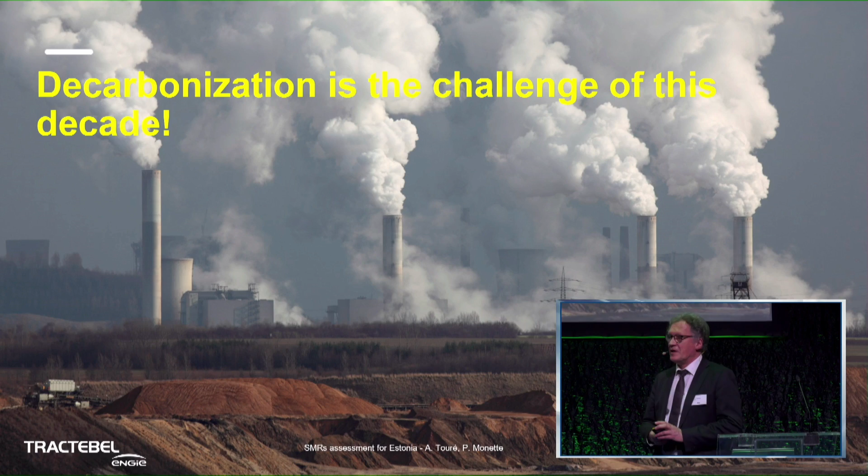So this is the challenge of the century. This is the challenge of this decade, to put in motion the solutions to actually giving up our addiction to fossil fuels, which today constitute 80% of primary energy, to carbon-free energy, as committed by Europe by 2050 to achieve carbon neutrality. And we know that achieving such an objective will require massive amounts of energy, carbon-free, available on demand, and very reliable.

We know that renewable energy alone will not achieve this goal, and so nuclear power must be part of the long-term sustainability equation. Safe, affordable, sustainable nuclear. When we talk nuclear, we first have in mind the current construction projects. So Generation 3 reactors, for those who don't know, were developed in the 90s, and tended to be of a very big size.

This EPR in Olkiluoto 3 in Finland is 1.65 gigawatt electricity. The contract was signed in 2003. So you see the huge construction time and actually construction delays. These are due to the size of these reactors, power plants, and complexity. And this complexity has rippling effects everywhere, on the design, then on the licensing, then on manufacturing and construction.

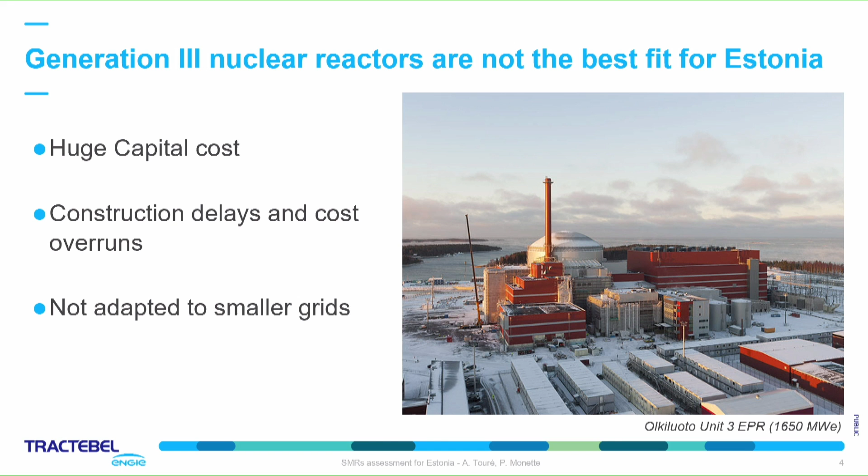It breaks my heart because I worked on this project, I worked on other projects, and there are people in this room who can indeed share the same experience. Unfortunately, those very large projects could not be built in some cases, or have taken huge delays and cost overruns. On top, they are not adapted to smaller grids, and they are not very flexible. So, too bad, but we need to move to the next generation or to another solution.

So, what are the conditions for new nuclear to become successful? We have pictured it in this slide in the form of three conditions of success, or three main challenges. The first challenge is to recreate an appetite for investing in nuclear. And that goes with smaller size, smaller capex, smaller financial risk, better certainty on manufacturability, shop manufacturing, shipping to the site, shorter construction time. That's absolutely necessary, otherwise the financial burden of covering the risk is just too big.

The second challenge is to recreate trust in nuclear safety and be able to demonstrate that the new solutions will definitely avoid or eliminate the risk of accidents which have occurred in the past. The third challenge is being able to play a significant role in the zero carbon transition that I talked about, in a new energy system which will have a lot of intermittent energy, so flexibility will be required, and also beyond electricity, there is the need to decarbonize other sectors of the economy, industry, right?

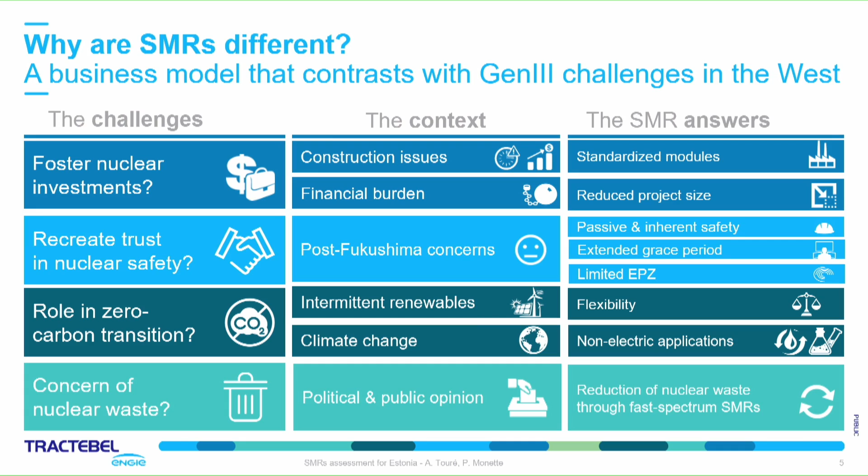And finally, reduction of nuclear waste. Some reactors, fast spectrum reactors, have the capability to work on used fuel and to virtually eliminate long-lived radioisotopes.

This is just one example of this revolution in nuclear safety by having the so-called concept of walk-away safety. If something happens, you don't require operator action. You don't rely on the AC or DC power systems. And there's no need for bringing additional water for a long period of time for long-term cooling. Triple crown safety as advertised by NuScale.

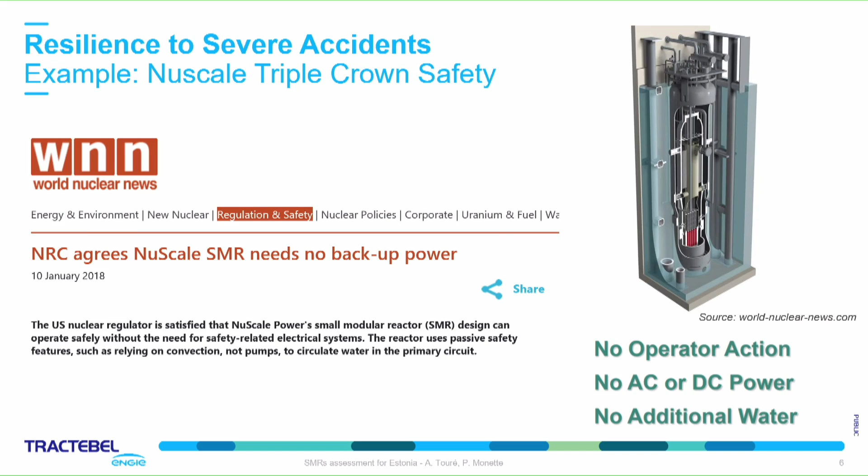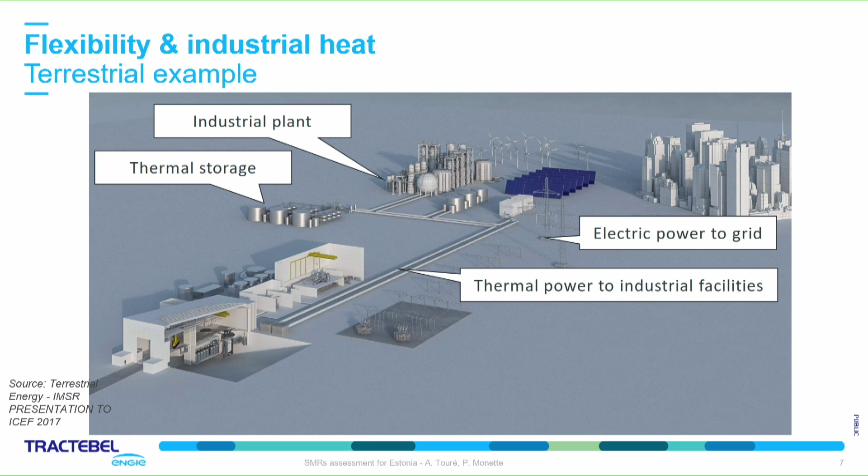And this is another illustration of the new energy landscape in which small modular reactors would play a role of providing electricity, but also variable electricity, storage capability, heat, industrial heat to an industrial complex, and serving the needs of cities. So things have to be seen in that kind of ecosystem of complementary sources of energy.

So what is the landscape today for SMRs? Well, it's flourishing everywhere in the world. There are over 50 different designs of about 6 reactor families. So it's very diverse. It's not like buying a car from a pool of different brands that are all essentially the same machines in terms of functionality and design. We have a great diversity of designs among those 50 products.

And of course, according to a particular need, in this case Estonia, there's a need to down select from those 50 designs. And that's exactly the question that will be addressed by my colleague now, providing this down selection methodology to zoom in on what we believe should be technologies to be pursued for Estonia. Thank you.

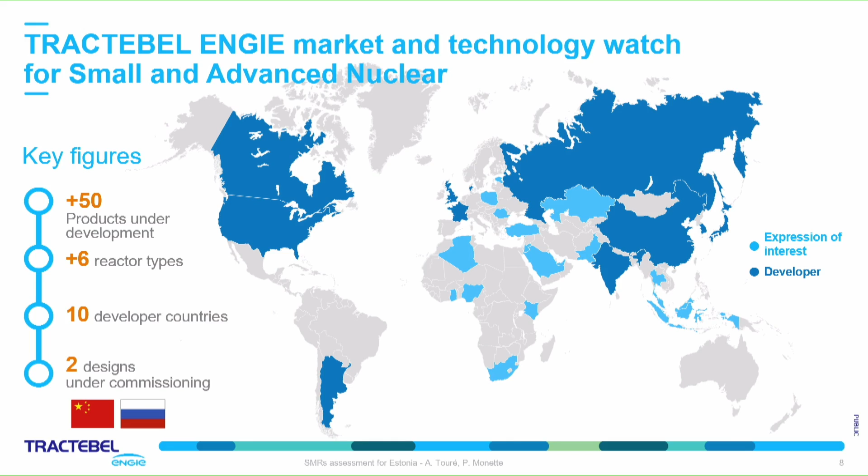I think now that we know a bit more about small modular reactors, we can really dive into this comparative assessment study that we've performed, which, as Philippe mentioned, looks at a landscape that is very big. We are starting from more than 50 design initiatives popping up around the world, and we wanted to answer two questions. What are the design initiatives most likely to succeed, to emerge from the market? And what are the best fits for Estonia and for the Estonian energy future?

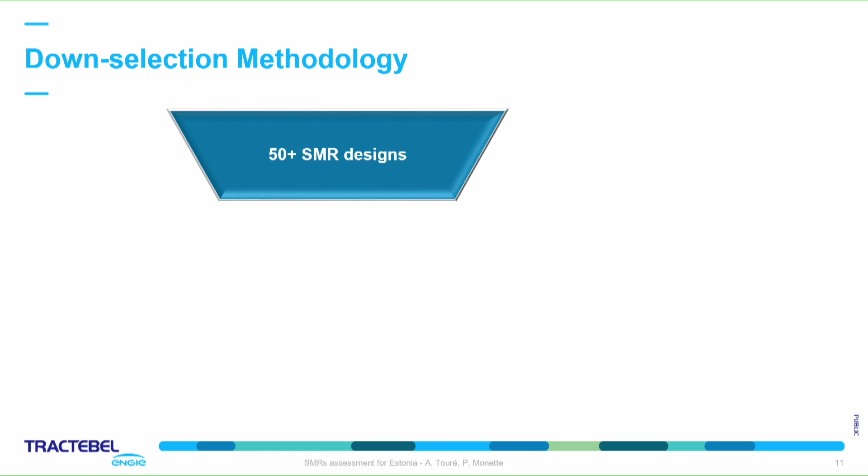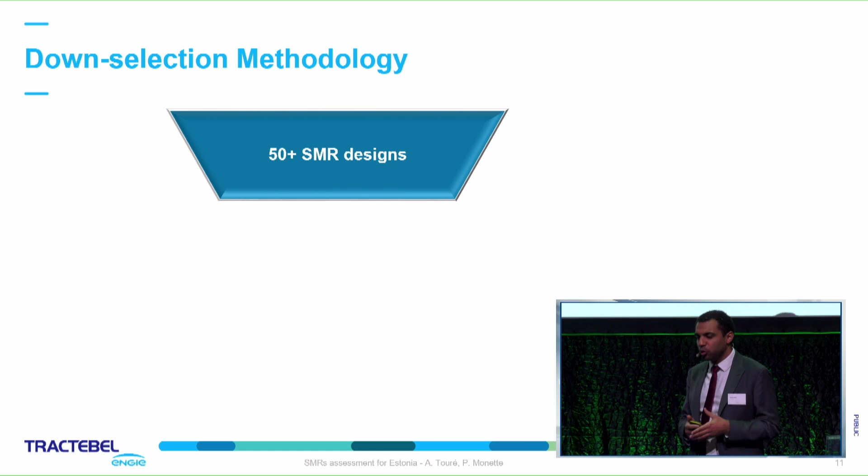And for that, we also asked ourselves one additional question: what are the criteria for success for an SMR? So that's the starting point of our methodology. As I mentioned, we started from 50 designs, and comparing 50 designs is an enormous task, and obviously not the most efficient way to deep dive into all of them. So we applied a list of exclusion criteria.

This list of exclusion criteria was established in partnership with Fermi Energia, and we wanted to see what are the real requirements for an SMR to succeed and to be part of Estonia's energy future. So let me just cite a couple of them. I won't go through the whole list, but we focused on small modular reactors, but not the very small, so not under 25 megawatts of power.

And one important criterion, to emphasize what my colleague Philippe has said, is safety. We put a very important criterion on being able to rely on passive safety. The idea is that for an SMR to be a game changer in terms of safety, in a worst case scenario, if something bad happens, the operator does not have to take action, at least for an extended period of time, and that was a strong requirement.

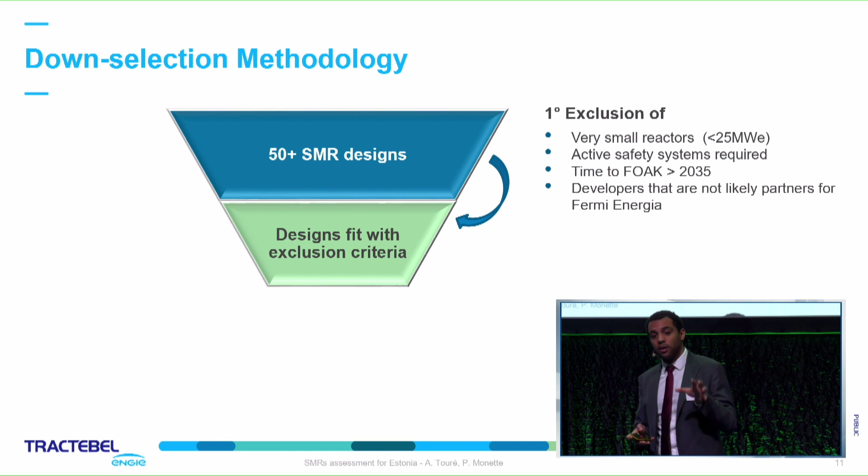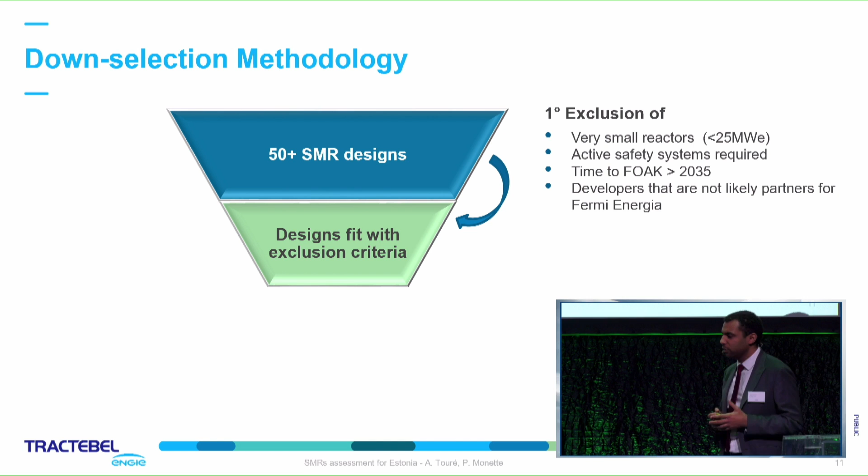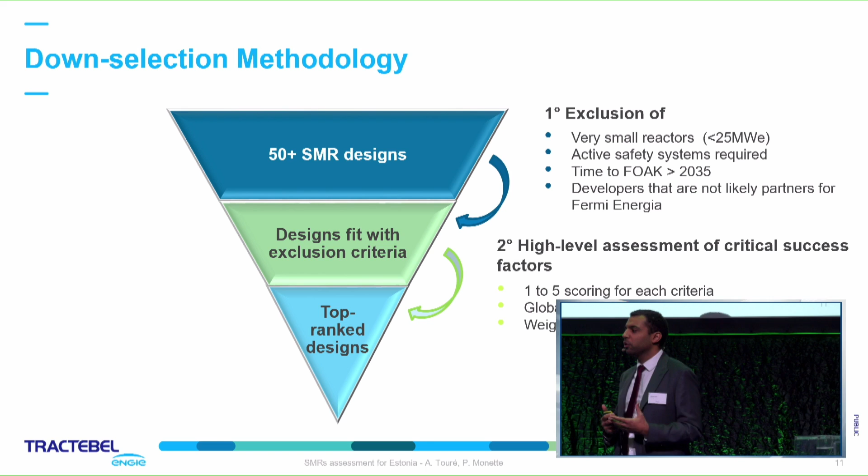So based on this, we were left with a list of around 13 designs. In fact, there is a 14th one, but I'll talk about that one afterwards. And we applied to this a high-level assessment methodology, a structured scoring methodology centered around 7 technico-economic criteria that I will describe afterwards, and some preference profiles to give weight to these criteria.

In the end, we are left with a list of top-ranked designs, and as you will see later in the presentation, there will be 4 that I will focus on a bit more at the end, to talk to you about what they are, why we think they might be game changers, and why they might bring very promising solutions to Estonia.

So without further ado, let's dive in. What are the critical success factors? What is necessary for an SMR to succeed? Well, in fact, what you can see here is that we summarize this into seven questions. So question 1, what is the ability of a design to be inherently safe and secure? So how can it improve safety?

Second one, how is it to fit in tomorrow's energy market? And by that I mean that we know that the future will, of course, rely more and more on renewable energies, which are intermittent energy and so forth. In order to exist and to be competitive in this market, you need to be able to be flexible, being able to load balance, produce power when there is no wind, when there is no sun, but also to bring solutions where the renewable energies cannot bring solution.

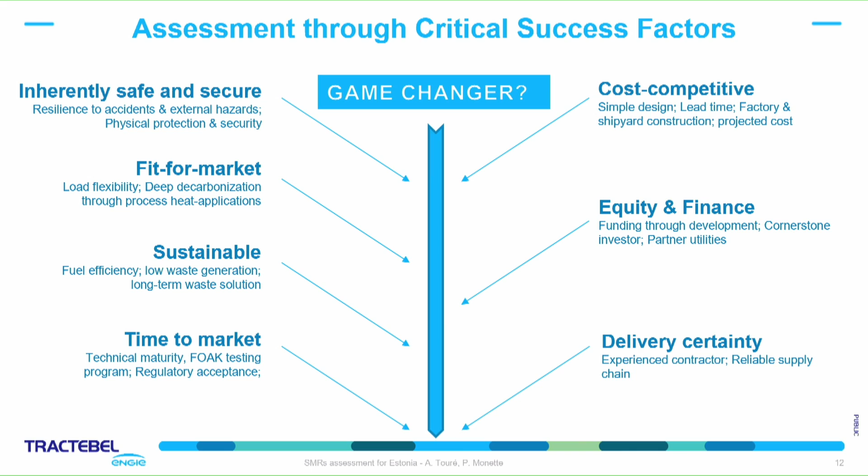Cost competitiveness, of course. I mean, I don't have to tell you that, but the environment is becoming more and more competitive, and even though we expect that there will be some system cost increase related to the renewables, you need to be able to compete in this market, and you need to be able to compete not necessarily with renewables, but also with gas and coal power.

And then I would say the last two criteria, what is the ability of a designer to fund themselves through the development phases? I mean, developing an SMR design is not a small endeavor. It takes time, it takes money, some courage also, because there can be some ups and downs. And so we looked at what is the ability of a developer to get through these stages and really bring a product to life. And in the end, also what is the ability of a developer, their supply chain, their partners, to bring the reactor to life on time and at cost.

My colleague Philippe has mentioned the recent challenges of Gen 3 nuclear reactors, and especially the case of Olkiluoto, of Flamanville, and the AP1000 in the US. Those have been difficult challenges for the nuclear industry. For an SMR to be successful, it needs to be able to be brought on market on time and on budget.

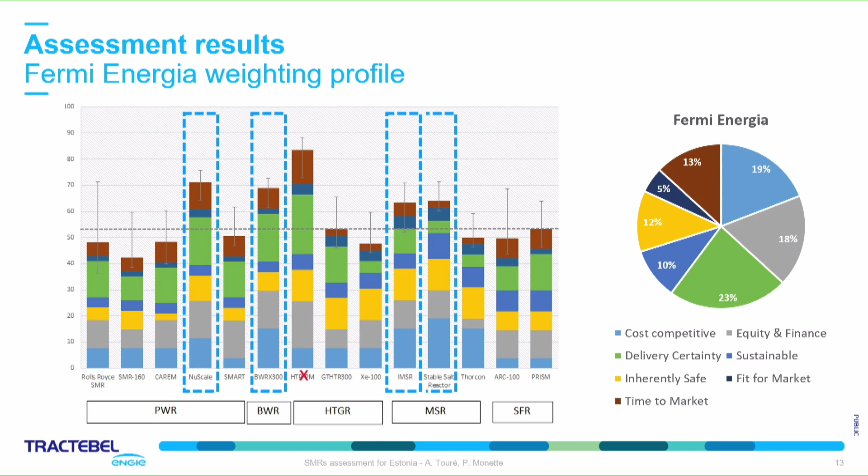So we wanted to have this as a benchmark, but it was in fact excluded on the basis that bringing a Chinese technology that is quite new and that has quite some challenges in the Estonian market might not be the best fit. All right, so let's have a look at different weighting profiles. I won't go through all of them. If you have the feasibility study, you can find them on page 84 to page 86.

But I just wanted to show different profiles where here we have a financial profile that puts the emphasis more on cost competitiveness and how that impacts the results. You see clearly that some designs that fared well in the others are doing less well in this configuration, and that's important. We wanted to show that, in fact, it's not only about scoring the designs, you're also a bit comparing apples and oranges, and so the methodology and where you put the importance matters.

Same thing we see here on a profile called Eco-Modernist. So there the importance is, I would say, put more on aspects important to public opinion. If I give an example, inherent safety, sustainability, and fitness into tomorrow's energy market are really important. And there again, we see completely different results.

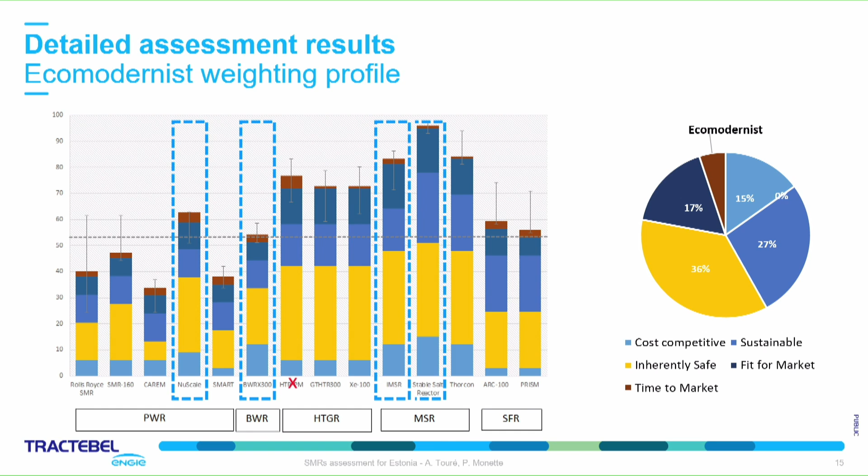What is important to see, though, is that if we apply a threshold, which is what we've done and what you can see in gray, the gray line on the graph, there are 4 designs, except the one with the red cross, that score continuously very well. Those are the NuScale reactor, the BWRX-300 reactor by Hitachi, the integral molten salt reactor by Terrestrial Energy, and the Moltex Energy stable salt reactor design. I will focus on this in a few minutes.

But before I jump to this, I wanted to give you a general overview of how, in terms of families of reactors, we see some trends appearing so that you at least have some understanding of what you could see in the results. So basically, what we see is that light water reactors fare very well. They are well-established technologies.

Probably some of you know that very well, but most of the reactors, and when I say most, it's really almost every reactor that we have running today around the world, are light water technology, boiling water technology, or pressurized water technology. So it is a well-established technology, and SMRs based on this technology would be available relatively shortly, in a 5 to 10 year time span, and definitely deployable in Estonia within the decade. So that's an important aspect.

In terms of safety, and I will be talking again about every one of the reactors, that was a strong requirement. We wanted all the selected SMR designs to have passive and inherent safety characteristics that would make sure that even if something happens, the safety function can be performed without operator action, at least for a period of time longer than 3 days, and light water reactors achieve that. You will see later the features of the BWRX-300 and of NuScale.

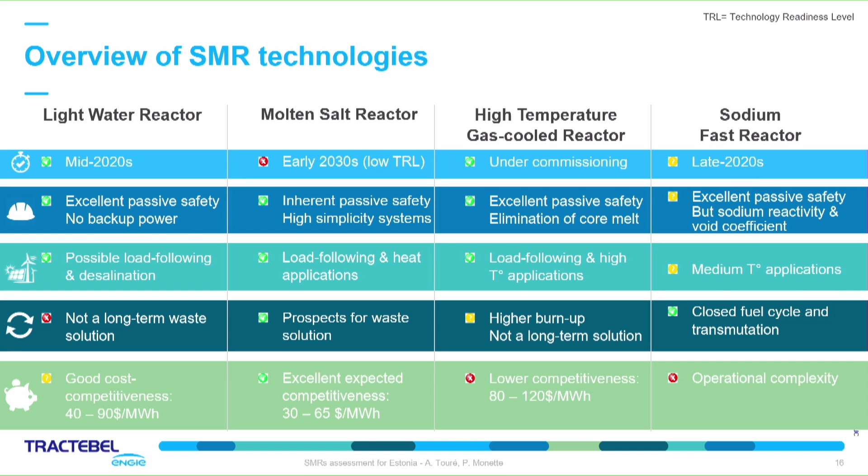You can make a sodium fast reactor very safe, but of course you need to engineer systems in a way that the primary coolant is sealed, and that brings some complexity, both in terms of operational aspects and so cost, but also in terms of what are the applications you can use them for and what you can couple sodium fast reactors to.

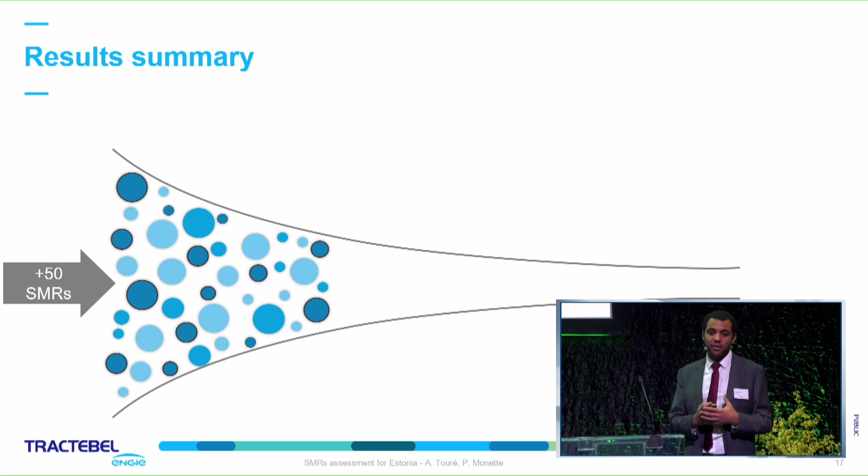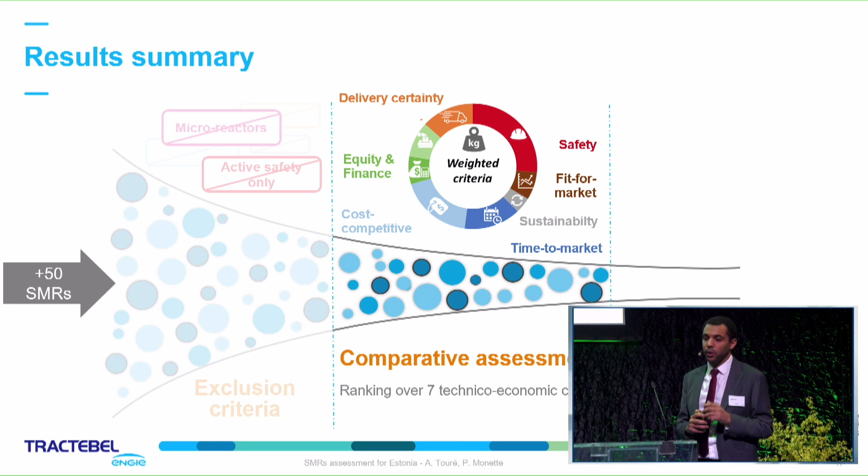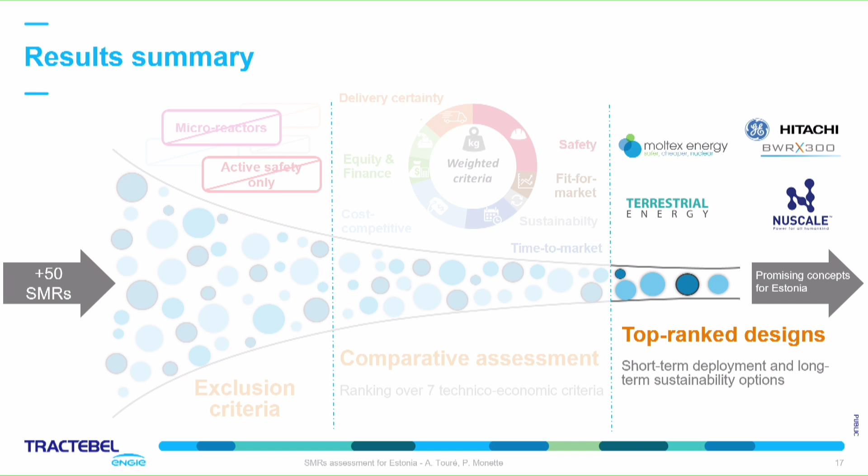All right. So to summarize very briefly what I've just shown you, we started from 50 SMR designs and applied a list of exclusion criteria that allowed us to reduce those 50 designs to a list of 13. Those 13 designs were assessed based on 7 technico-economic criteria that you can see around the wheel. And the results of this is that we've established a list of 4 top-ranked designs that are, in our opinion, very promising options for Estonia.

I should say that those options do not compare exactly on the same foot. And what I mean by that is that we have the short-term deployment options offered by light water reactors, which is a well-established technology, and that could be deployed within this decade.

And we have long-term sustainability options that I would say is a look a bit further in the future, for the next decade, most probably. Beginning mid-decade, well, we can debate, and I'm sure there will be some question around that. But at least technologies that can bring new, exciting features, waste reduction, as I mentioned, but also deep decarbonization of the energy sector by the high-temperature process heat applications.

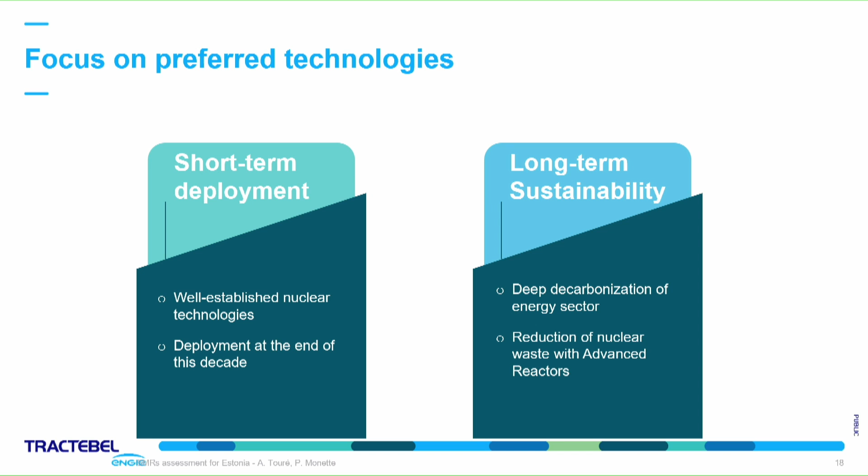So let's now focus a bit more on the selected and chosen design. So what I can say about the 2 light water reactors is that they are very different. One is the NuScale design, a pressurized water reactor that is built in modules of 60 megawatt, and you'll see in the next slides how those modules are actually assembled in a common pool in patterns of 12 modules within the same unit.

And in terms of cost, that is quite cost competitive if we compare it to the Gen 3 reactors. Just to give an order of magnitude, for the Hinkley Point C project, so not the first Gen 3 reactors, we are at a capex of around $7,500 per kilowatt.

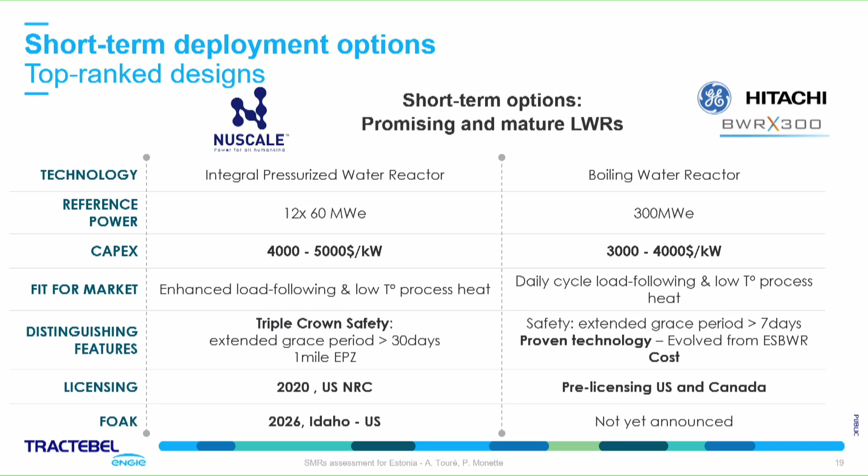So probably a high competitivity, but a competitivity that is even beaten by the boiling water reactor of Hitachi, the BWRX-300. A boiling water reactor of 300 megawatts that is very simple, in fact, in its design. It's very compact and simple. I will show you a picture. And that makes it also a very competitive project and interesting technology for Estonia as an energy future.

So just a couple of things on the NuScale design. What you can see here is that the NuScale design really is different from what we know in the current pressurized water reactor technology.

So the metallic vessels you can see in the pools are all containment vessels. So basically, what is contained in those metallic vessels is really the whole reactor, the whole reactor building, or almost the whole reactor building that we see in a PWR. So, during the questions I can come back on the Olkiluoto project and show you the difference, but it's quite impressive.

And those reactors are put in by 12 in a pool. They are factory built and shipped on site. So that's also a new way of constructing and building a nuclear power plant that brings some interesting prospects.

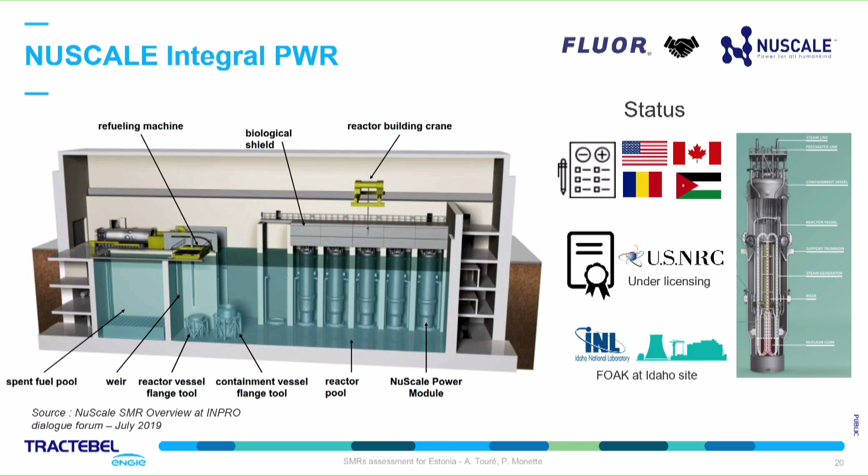NuScale has very interesting features in terms of flexibility. They can go as low as 20% of the power load, and so one of the characteristics that they've embedded in their design is the ability to load follow renewable energy and to really be able to balance the intermittency of energy in the upcoming market.

And the last technical thing I want to say about NuScale is about its safety features. I won't go into too much detail, but what they've managed to achieve is what Philippe introduced, and they call it the triple crown of safety, which means no operator actions, no backup power, and no water inventory required during the first 30 days of any accidental or incidental scenario. So it is an achievement, specifically considering that it's a PWR.

Last word on NuScale. It's a technology that is becoming quite mature. They are undergoing the licensing process of the US NRC for the moment, and they will have their design certification probably by the end of this year, and are looking at building a first-of-a-kind reactor in Idaho in 2026.

Moving to the BWRX-300, I would say that, again, the real beauty of the BWRX-300 can be found in its simplicity of design. It's a very compact design, low cost, based on well-established technologies, and so we can also be very confident in the ability of GE Hitachi to deliver this product to the market, because it is based on features of the ESBWR that is already certified in the US, and on the know-how acquired in the building of BWRs.

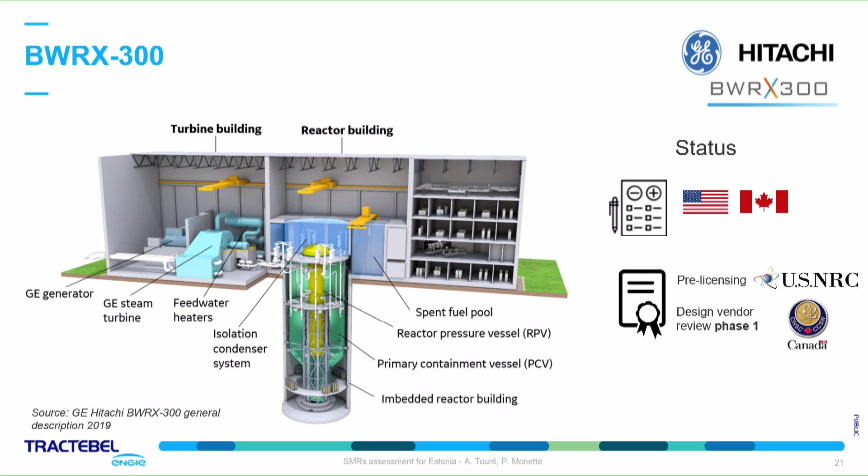In terms of maturity, and the GE Hitachi people are in the room, so feel free to ask them about the reactor afterwards, it's a design that is currently undergoing the pre-licensing of the US NRC and of the CNSC, the Canadian Nuclear Safety Commission.

So a focus now on molten salt reactors. I will be much quicker on molten salt reactors, but I wanted to say a few things. First, in terms of safety, molten salt reactors bring something completely new. Molten salt reactors use liquid fuel, and in the molten salt, no pressure. To give you a comparison, a boiling water reactor is around 75 bar. A pressurized water reactor is around 150 bar. This brings its own complexity in the plant. No pressure in molten salt reactors.

In addition to that, the molten salt has the ability to chemically retain fission products, so that even in the worst imaginable scenario, the radiological consequences of an accident would not impact the off-site area. So impressive features. And we have here two different molten salt reactors.

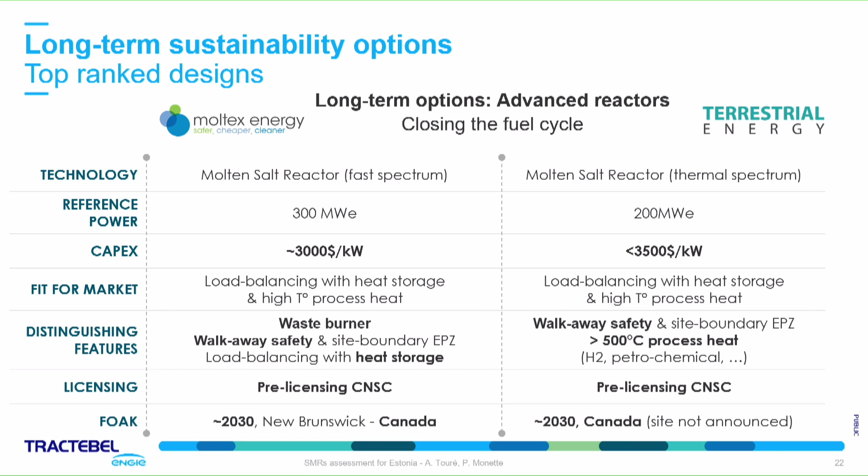The Moltex design is a 300 megawatt design, fast spectrum, so focused more on being able to recycle spent fuel. Basically, that's their business model. Whereas the Terrestrial Energy IMSR design is more focused on bringing the product as soon as possible to the market, reusing most of the existing, very little, experience with molten salt reactors, and so they use a graphite-moderated molten salt reactor that is thermal spectrum.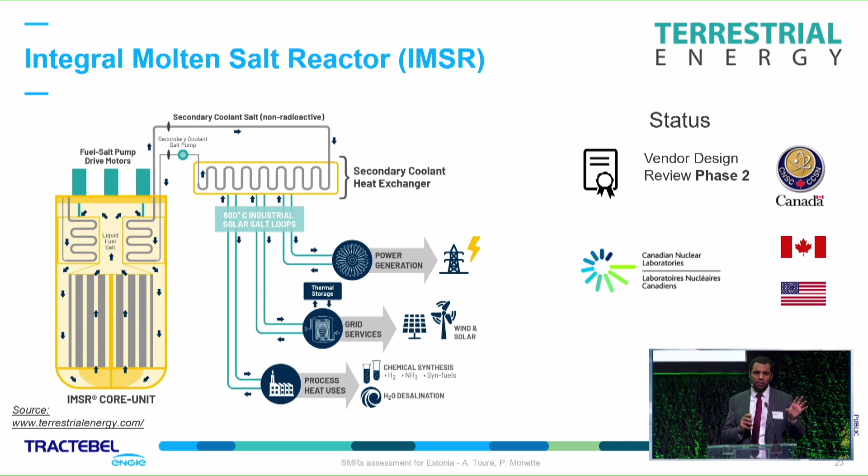As I mentioned, they bring new solutions in terms of process heat application, based on the fact that they can output a temperature of 600 degrees, and this high temperature steam really opens new areas of application. Heat storage can, again, be a game changer in flexibility. The first two reactors we've seen had flexibility built in, but this is really a completely different level, and high temperature process heat applications.

The IMSR design by Terrestrial Energy, in terms of maturity, is probably the most mature molten salt reactor that you can find on the market right now. This is partly due to the fact that they've made some design choices that are, I would not say conservative, but at least oriented towards rapid time to market. For instance, they use graphite-moderated core units that are replaceable every 7 years.

We know that corrosion issues have been a problem with molten salt reactors, and to avoid that, they give the reactors a short lifetime, and those reactors are replaced every 7 years.

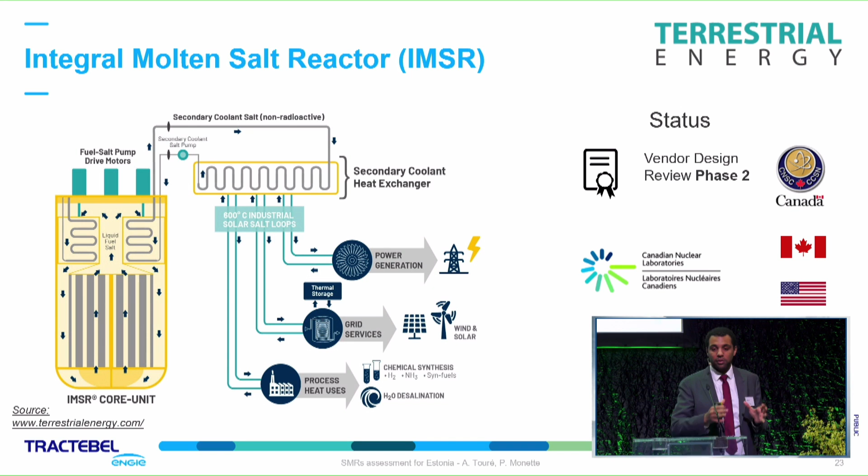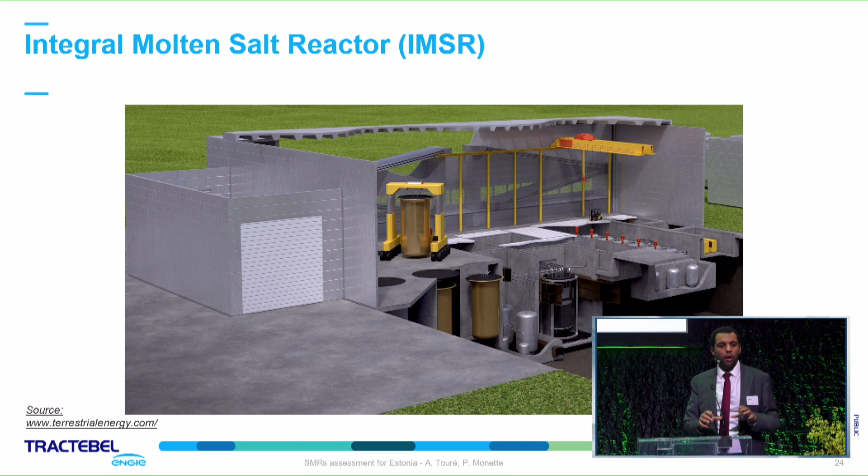What you can see here is actually the core units in the building, and, well, I'll show you during the question and answers if you want to, but we can see here a core unit and the spent core units that are also stored in the reactor building.

Then the molten salt reactors of Moltex, the stable salt reactors: again, as I mentioned, its main feature is a waste burner, so it reuses spent fuel as a fuel to reduce, I would say, the lifetime of radioactinides, but also to power its reactors. So a very promising feature, I would say, for the future of energy.

In terms of maturity, I didn't mention Terrestrial, but both reactors are looking at a first of a kind in Canada around the 2030s. Currently, Terrestrial Energy is undergoing the vendor design review of the Canadian Nuclear Safety Commission. They are in phase 2. Moltex is in phase 1, a bit behind. But they have a site already identified on which they would like to build their first of a kind in the early 2030s.

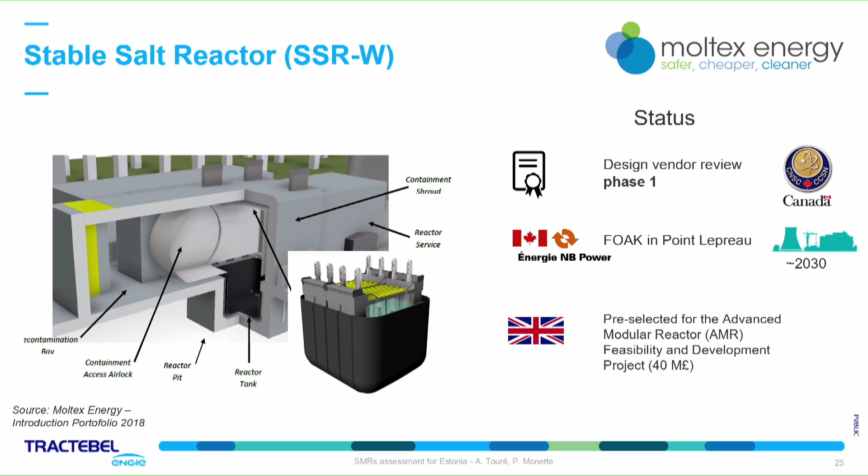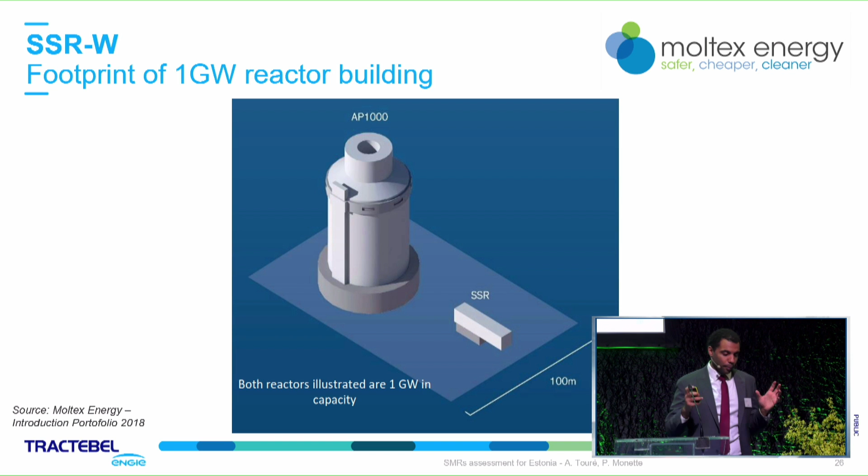I will just show you this picture to see why molten salt reactors are so cheap, because that's one of the things I mentioned, and it has to do mostly with the size. Basically, you compare a 1 gigawatt reactor of Moltex and the AP1000, you see directly the difference in size. It makes pretty much the cost. In addition to that, you have to take into account also the system design simplicity, but I think that gives a good picture.

And I wanted to finish the presentation of the reactors on this feature of heat storage that molten salt reactors can bring to life. Basically, you can run the reactor at full power all the time, store the energy in the form of heat, and deliver electricity to the market only when electricity is needed. So when there is no wind, when there is no sun, you produce electricity at that time, and the energy you produce in the meantime is stored.

So it's not like with the other reactors where you have to decrease the power. There you can really produce the full amount of power and just release it to the grid when it is necessary. And we've seen in an economic study that this feature has some real value.

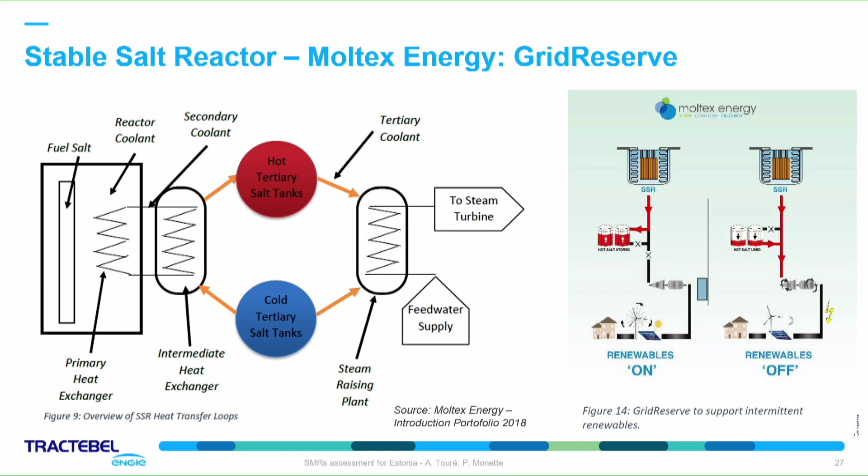So if I want to conclude this presentation, there are 5 things that I would like you to take away. First, there is a strong international momentum around small modular reactors. The nuclear industry is on the verge of building demonstration SMR projects in several parts of the world, and SMR technology is seen more and more as a promising technology.

The second one would be light water reactors are deployable within the decade. So we have technologies that are not long-term prospects, that will be built in the coming years, and that represent an option for Estonia's energy future in this decade. The third one, long-term sustainability is achievable for nuclear reactors, and we see that the full potential of new nuclear can be achieved by those molten salt reactors that will arrive at the beginning of the next decade.

Fourth one, SMRs can really be promoted together with renewable energy. I don't know what is the case in all the countries, but what I see in Europe is that sometimes there is a bad perception of nuclear energy as a competitor to renewables. This is not the case for SMRs, and that's very important.

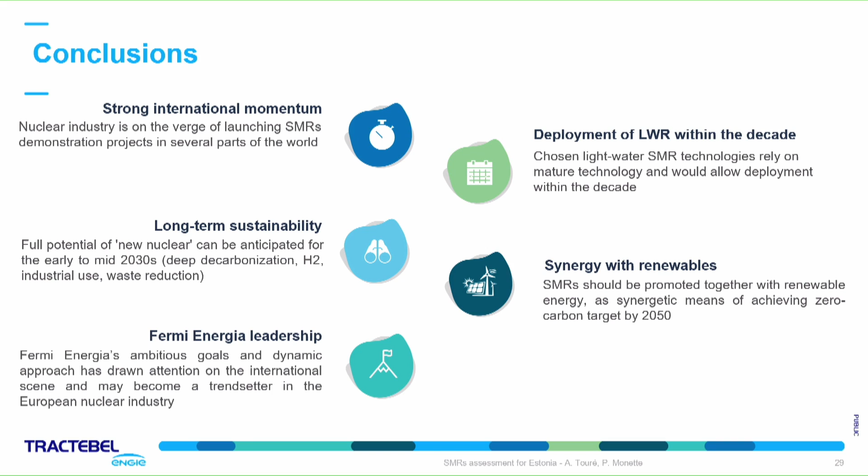I'll leave you on this final thought before we take a couple of questions, citing the International Energy Agency director, who said, there is no sustainable energy future in the absence of nuclear energy.